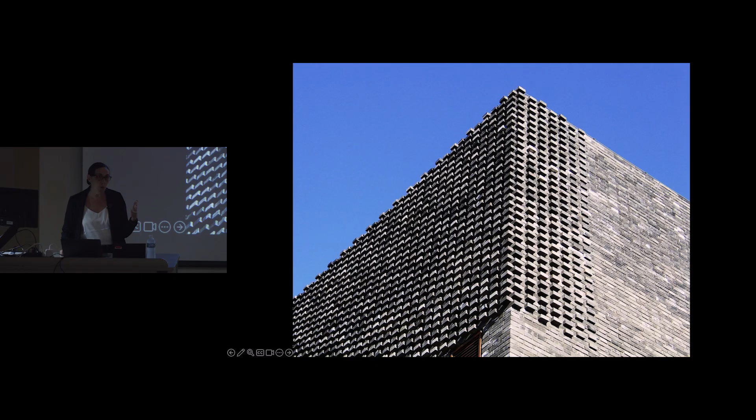I have always been very interested in the making of architecture, how we detail buildings, what are those materials that we put together, and putting them together in new and innovative ways. It took me to digital technology and digital fabrication, which for me was a big blind spot in the discipline when I became interested in it. I have pursued my interest through exhibition installations as well as full-scale constructions, and I think of it as all one and the same.

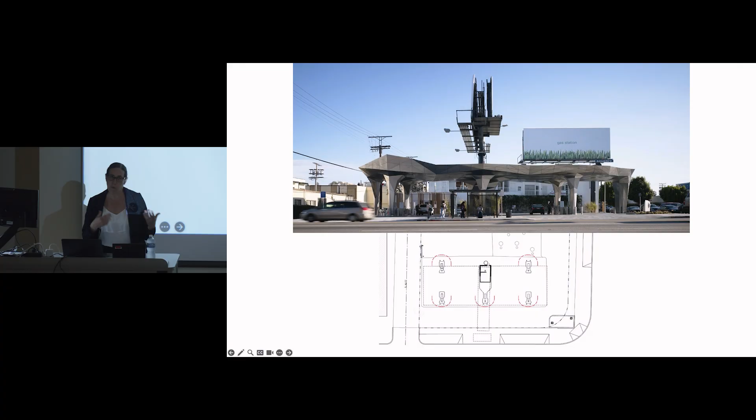So I think today architecture should be concerned with speed, and we should concern ourselves with things that might be very, very quick. When we did this gas station in Los Angeles, we had 9 months from the beginning of the project to the end. But of course, this is an object that you see when you're driving fast or when you're stuck in traffic, either one, it could be depending on the day. But we were asked to remodel this existing Arco station.

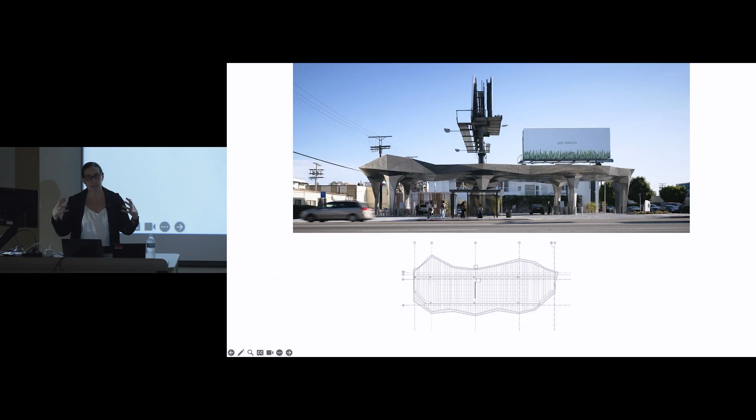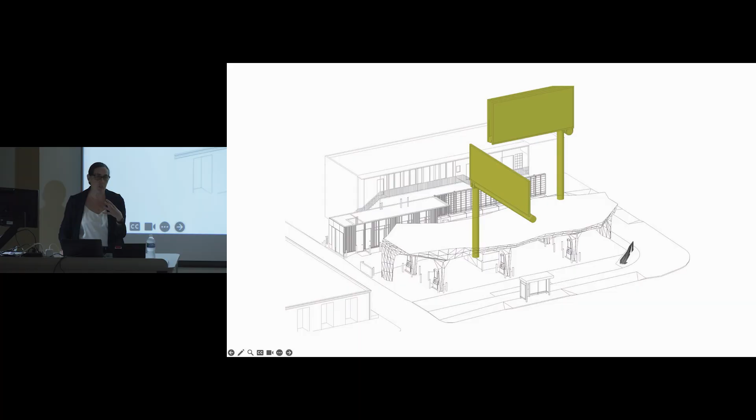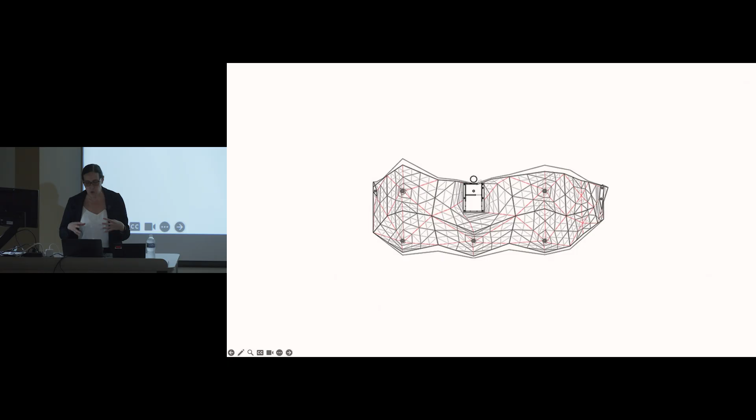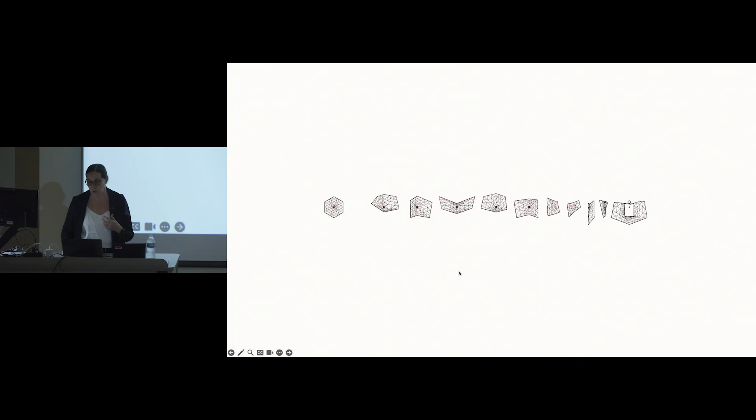So it's actually a remodeling project, and the code really put pressure on the character of the building. We were required to actually have certain overhangs in relationship to each of the pumps, and that gave the peculiar shape to the canopy, as well as its relationship to two existing structures, which are these gigantic billboards. So the billboards actually are the main reason for the deformation of the canopy. In order to respond to all these forces and to respond to them quickly, we decided to develop a module that could then be agglomerated into the canopy. So while each of the components might look different, they're actually part of the same family, and they're all derived from the same kind of module. That piece is then understood almost as the generator of the system.

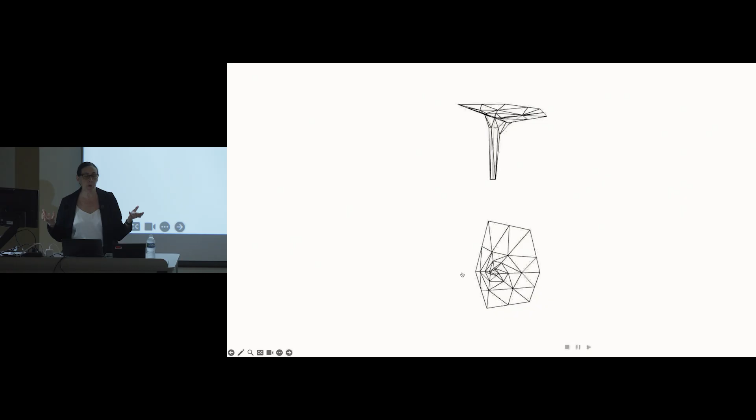And the intention when we were hired is that this was going to be a demonstration project, and that then this would repeat in other gas stations across North America. The module has the same number of components. All of them expand and contract depending on where you end up in the site and what forces you are responding to. So on the one hand, we have sort of what is almost a normal canopy.

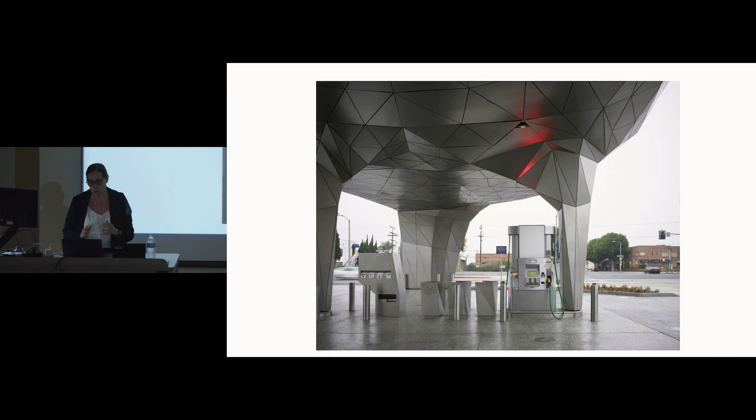Towards the edge, it gets squished because it's at the end of the site, and again, the property line is putting pressure on it. Or towards the street, it becomes more of a billboard. Or it can also house where you pay for the gas.

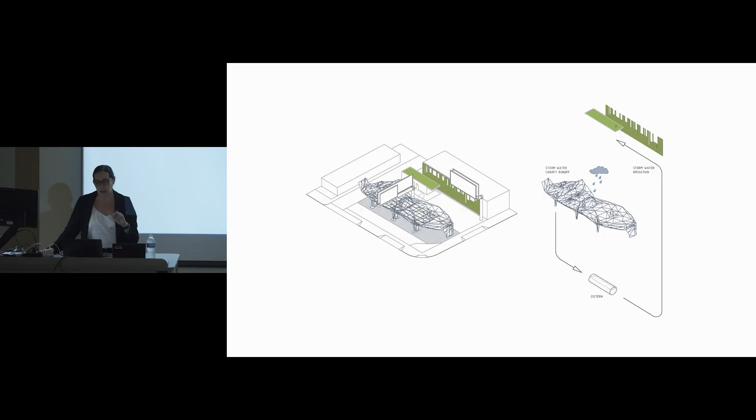Now, while we were very concerned with speed, and we were very concerned with the impression that the building leaves on you quickly—you're only there for a few minutes—we also were interested in the environmental impact of the gas station. I know it sounds like an oxymoron, but we wanted to somehow use the gas station, if it was going to be repeated throughout North America, as a test ground for how to deal with rainwater collection, even in an extreme desert weather like Los Angeles, but also that we could embed within the project ideas of remediating for the oil spills that inevitably happen when you are actually putting gas on your car.

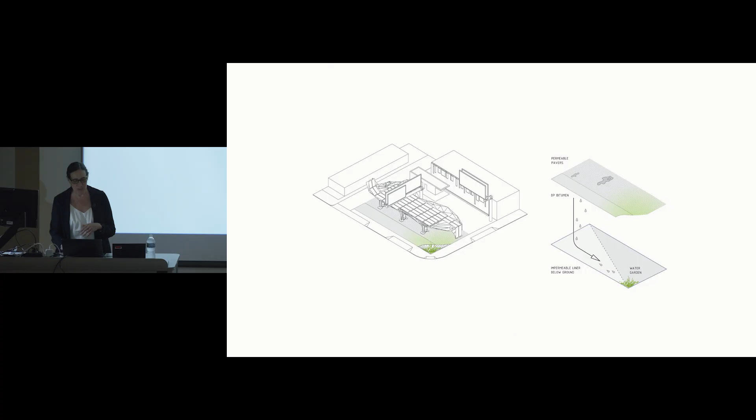So this combination between something that is fast, that you drive by fast, and something that actually takes care of the site, takes care of the ground, is something that for me is important, not only in a little project like this, but perhaps in every project.

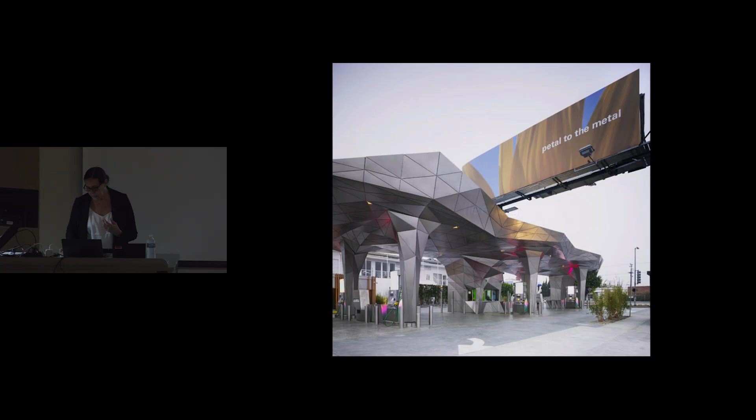Now, the truth is that architecture is fleeting. Most buildings have more than one life, and there is a loose fit between the program that the building is built for and how it's used over time.

So when we were commissioned to do the Fleet Library for Rhode Island School of Design, Fleet Bank, which none of you know anymore because it's disappeared, gave the space to Rhode Island School of Design, and it became known as the Fleet Library. This is a space that is in the National Register of Historic Places. It has amazing architecture, and all I could think about when we got the commission is, all I have to do is to not mess it up.

So how do you go into a space and not mess it up? We were really thinking of temporary structures, temporary pavilions, things that at one point in history could actually be dismantled and taken away.

This coincided with me being at Georgia Tech as the first Ventulett professor, and I was doing a series of experiments with students where we were using digital fabrication technology as a way of working out things like, can you build something without scaffolding? Can you use the technology to produce joinery that allows you to put two things together easily and produce complex forms?

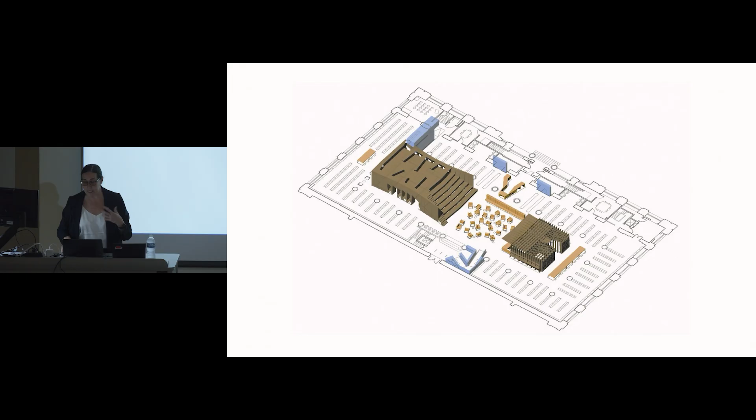The library had more program than the space could hold. So we came up with the idea of doing two pavilions that float in the space, one holding sort of noisy functions like Xerox machines and group study, et cetera, and the other one being the circulation island where you check out and return books. And the pavilions sit freely in the space and really welcome the students into their functions.

We thought of the library as a gigantic living room to the dormitories above. So we really designed it as a place where you could engage on multiple scales. For example, on top of one of the islands, you can access it and be really close to the capitals, be really close to the coffering. So we're also offering a different experience of the space that was never intended.

Now, in order to be able to build these—I call them temporary, but Rhode Island School of Design does not think of them as temporary—we needed to prefabricate them off-site and then bring them and build them inside so that we could coordinate with the academic calendar.

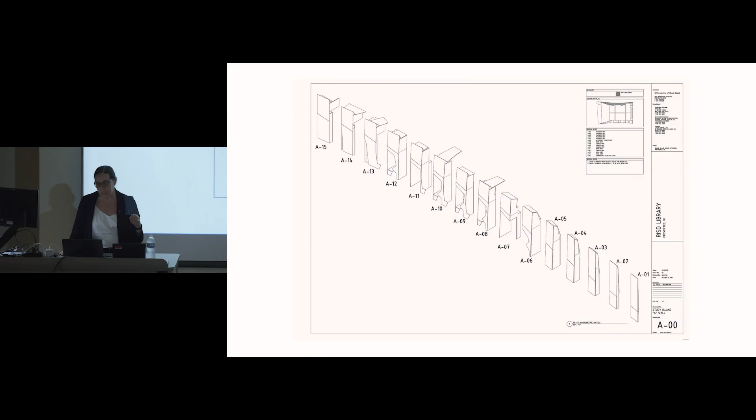So we convinced Rhode Island School of Design that we should digitally fabricate them. This is a time where every shop in America already was digital, but architects acted like they didn't know it. And we invented a new way of thinking about shop drawings. There are no shop drawings for the project. Instead, what we did was a manual of assembly.

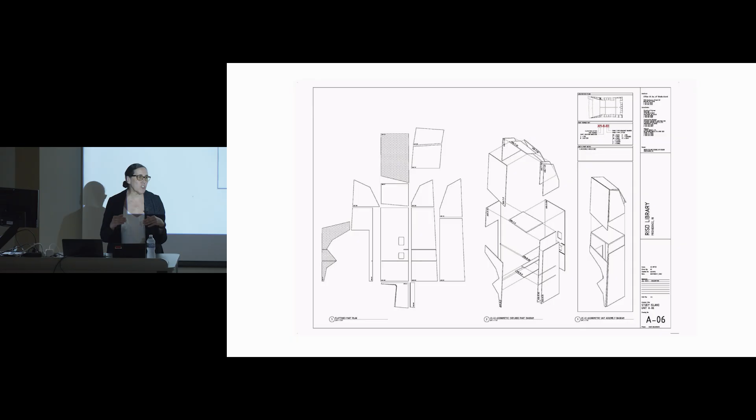All of the components of the pavilions have the same number of pieces, and we guide those who are assembling it into how to assemble. One of the things that is interesting about digital fabrication is that the tools, the machines don't care what shape they cut, but you have to worry about who is assembling it because, of course, it's assembled by us, it's assembled by people. So understanding that translation was an essential part of the project.

We also realized that because Rhode Island School of Design has students for 4 or 5 years, we had a dedicated audience, which is a very different kind of public. It's not a public like one that goes to a museum once in a lifetime. This is the kind of public that comes back and comes back and comes back. So we were interested in using digital technology as a way of engaging the human body. We decided to not design for the average, like in graphic standards. All of you are probably familiar with this.

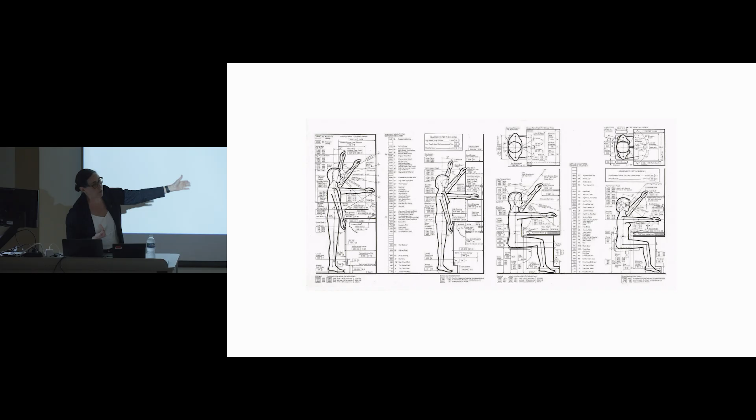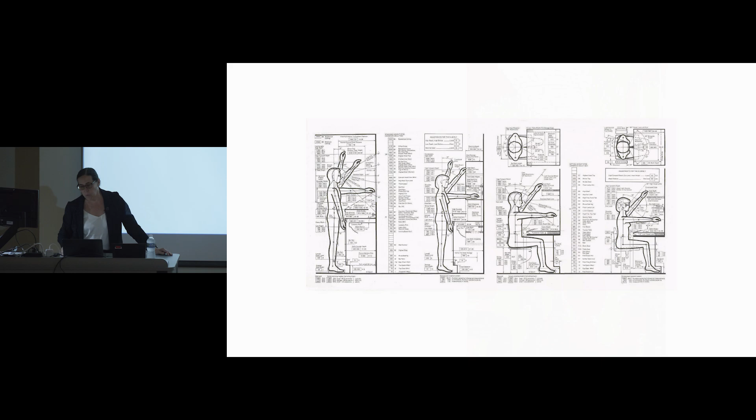Instead of designing for the average, we decided to design for the range. So all of our benches are different heights. All of our benches are different widths. Some of our cubicles accommodate wheelchairs. And in some cases, we were very didactic, from the tallest standing male height to the lowest seated female. So the intent was that digital technology, in combination with the length of time, allowed us to design for many as opposed to the average few.

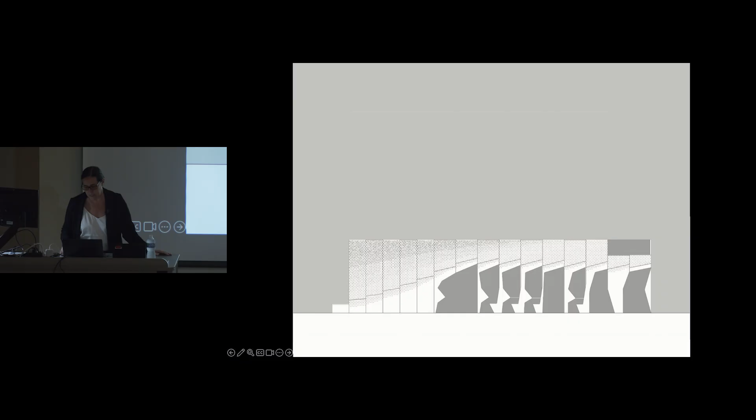So we asked the librarians to come up with names of artists. We knew that we could afford 20,000 characters as a way of perforating one of the pavilions, which was the heaviest in the space. We developed an alphabet, and the librarians obliged, and they gave us a really nice list that represented not only world artists, but also faculty within Rhode Island School of Design.

And then something really lovely is that they played a joke on us. So the name of everyone in the team is in the library, but also I was pregnant at the time. The names of my 2 children are on the walls of the library, as well as my 2 dogs, which is pretty sweet. So if you walk around and you see a Laszlo, it's not Laszlo Moholy-Nagy, it's my dog.

So while the premise of the building was one of transition, one of building something quick, because it had to be built over the summer—it was built on modules, by the way, and they arrived on a Monday, and by the time I came to the site on Wednesday, they were done. I missed the assembly. So while it was predicated on this idea of something that could be quickly assembled but also taken apart, the cultural framework that it produced, I would argue, is equally important.

Now, if we think of the word time, we also need to think about not just quick or long, not only passing and fleeting or long-lasting, but we also have to think of the mundane sort of passing of time during the day. And this is something that architecture, I think, does extremely well. We are all aware of the time of day by how a building is designed, and in particular by how light is accessed, and whether we understand the change of the light from day to night.

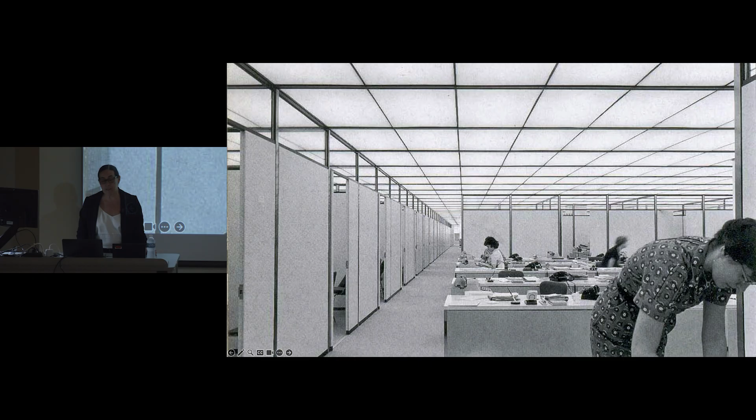This is, I think, particularly important when thinking about access to light as a commodity in workplaces. So the American workspace is actually predicated on light as being a commodity. This is a prototypical early 20th century office building where all of the offices of the executives are in the perimeter and the support staff is in the center with no access to natural light, instead afforded quite a lot of artificial lighting. This is a prevalent model.

So when I was asked to do this very small, low-budget office building in Logan, Ohio, I became obsessed with this idea of no corner office, and that light somehow should be evenly distributed. Now, distributing light evenly is actually an impossibility because you are either close to a window or you're not, or you're close to the edge of the building or you're not.

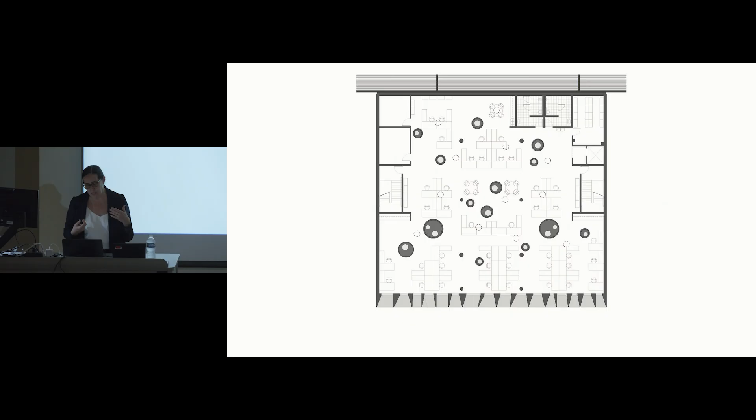And this is particularly difficult when you're dealing with a very cheap building. There's no other way to describe it—low budget building—but also one that is facing west, meaning that the primary source of light will really be intense at a certain time of day. So what I decided to do was to create an open plate that acts as a free plan where everybody's sort of the same, so engineers are sitting next to support staff. There is not a hierarchy of creating offices.

And I was very lucky to be with a client that got excited about this idea. It fit the ethos of how he thought of his company. This is the upper level. And then on the lower level, we actually created offices that needed to be offices, like accounting, for example.

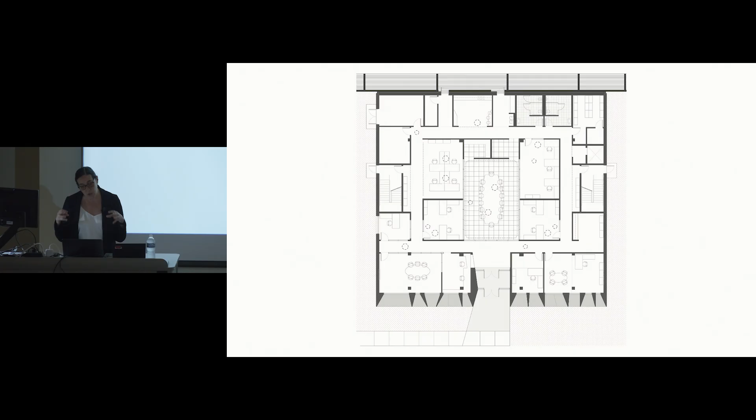You don't want all the numbers out in the open, or the research branch that has secrets, et cetera. So those actually get proper offices in the lower level.

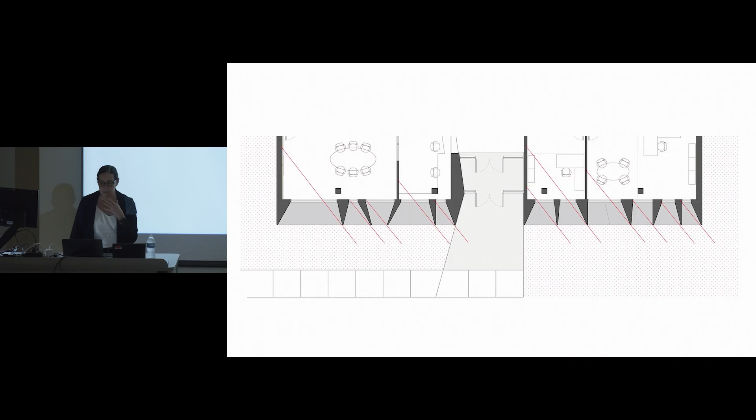So for the West, we designed a brise-soleil facade, and the facade is calibrated very specifically in relationship to the furniture behind it, so that no direct light falls on a desk, so everybody has the same level of even light. And in the lower level, it bounces off walls. It's interesting to see how the building changes dramatically throughout the day.

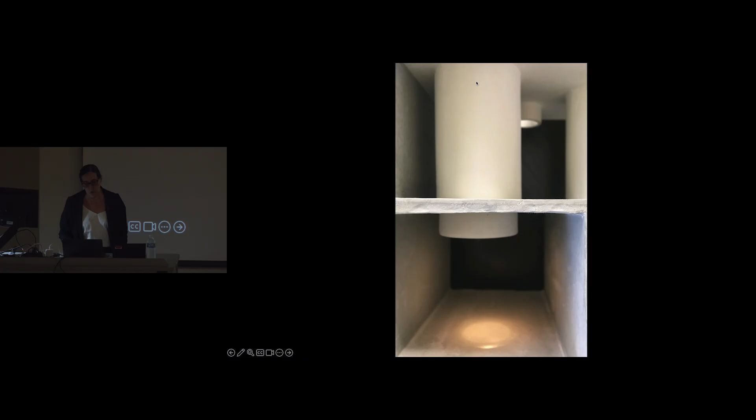Now, for the interior, we have a combination of structure and systems that penetrate through that upper level into the lower level. Most importantly, we created a distributed system of skylights and solar tubes, some of you might be familiar with this, that bring light not only to that upper floor, but also penetrate all the way through to the lower level.

And what this did is actually quite remarkable, because you have even natural light throughout the space. In fact, at the beginning, it was a little too intense, and they had to adjust the solar tubes to lower it a little because it was just too bright, which for me was a surprise. When they asked me at the beginning how much I wanted to adjust it, I said, none, I want a lot of light. And then it was too bright. So the idea is a very distributed system that brings light equally throughout.

And the hypostyle hall, then, again an ode to the Johnson Wax building, creates a lot of variety. The structural system is of one size, mechanical systems of another, and the solar tubes, which are sometimes combined with mechanical systems, of another. This kind of distributed system that brings together different logics creates enough variation that it pushes all the different desks and workstations together in a very intense relationship.

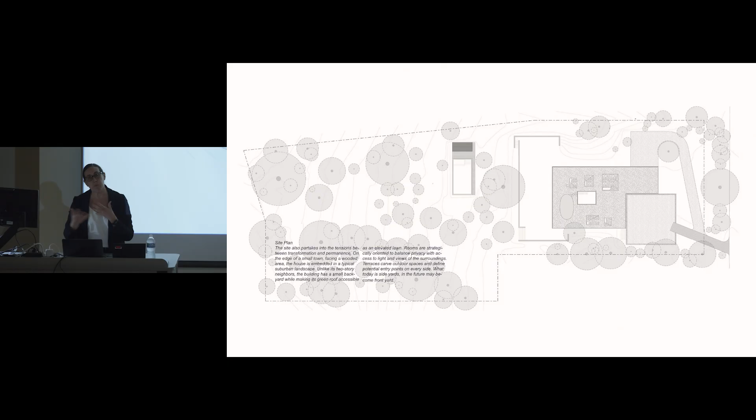We just opened an exhibition at Princeton called The House Transformed, where I asked almost 50 architects to imagine homes that are no longer the single family home. The idea of transformation is essential to the exhibition. This is my own entry into that exhibition. I was interested in thinking differently about the suburban home, not as for the quote-unquote nuclear family, but a suburban home that could accept multiple versions of family and could definitely change over time.

That music is not mine. Although I like it, we can leave it as background. Very present in my thinking.

So I should have said, I'm sorry, when I talked about the corner office, I mean architecture for me is always very personal. It's difficult for me to think of things without tying it to people that I know. My mom was an administrative assistant since I was little. So my mom was one of those people that never had access to natural light.

So I had very present Eliot Noyes' home. I never thought I would design a house for my family, and here I was designing a house for my family. Eliot Noyes decided to do this sort of house in the woods with a lot of glass, a lot of reflectivity, and this is one of the bases for the project.

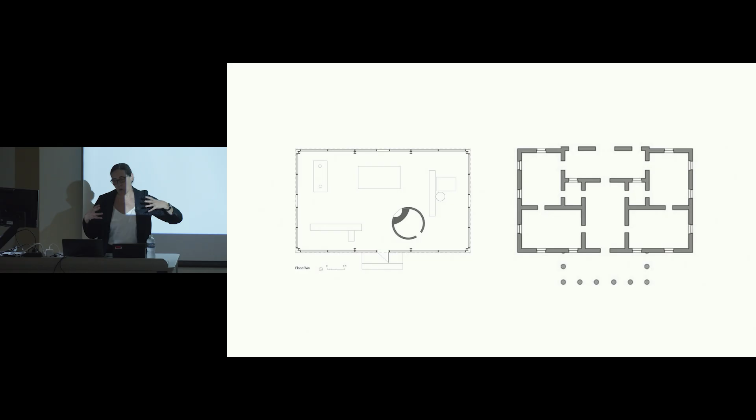And I became interested in 2 modes — I always like both and. On the one hand, the free plan of the glass house. On the other hand, the poché of Palladio, and how both are insufficient really for structuring life. One is too open, one is too closed, and they say different things about us as humans.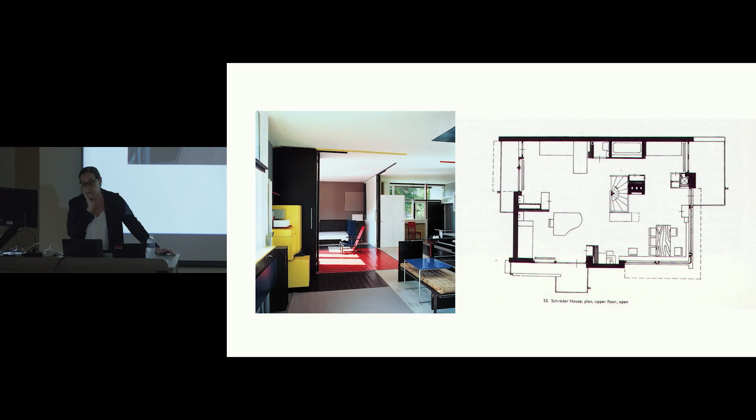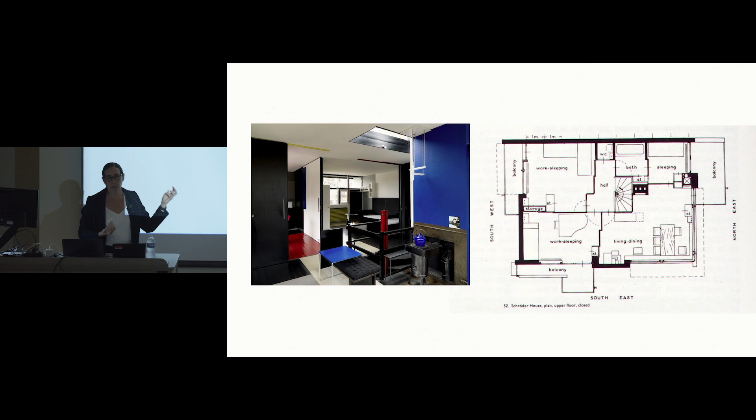I began to think of alternatives like Rietveld, who designed a house for Mrs. Schroeder and her kids, a single mom like me, and how that house actually transformed every day. Every day they took these walls and closed them and made rooms out of it. So I thought, is it possible to reimagine the American single-family home in this way? And I thought, no, of course not — this is crazy, this is a very rarefied example. But I think there are still lessons we could learn from it.

So I set out to design a house that would very much operate as a free plan with a great deal of exchange between members of the family.

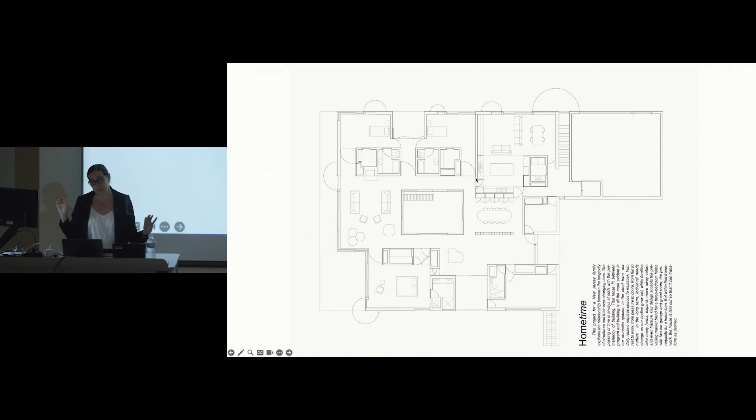But I also decided it was important to embed within it the possibility of change. So the house has these oversized doors, 5.5 feet wide, that when closed blend into the paneling system of the home and become walls. So the house is intended to oscillate between free plan and poché over the course of the day, but also welcome change over time.

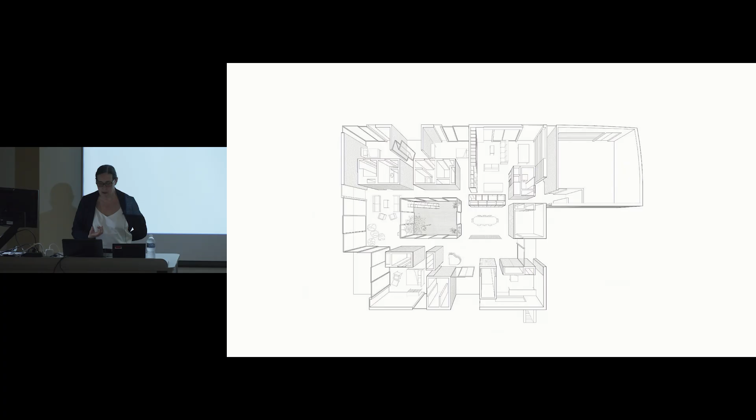It was important to me that the house be one story so you can grow old in it, but also that one story could revolve around a courtyard. I'm from Caracas, Venezuela — the courtyard home is one of the prototypes we look towards. I thought of the courtyard as one of these floating objects of the free plan. It very much interrupts the flow of space, but it also reflects the outside — reflecting trees, reflecting the passing of clouds.

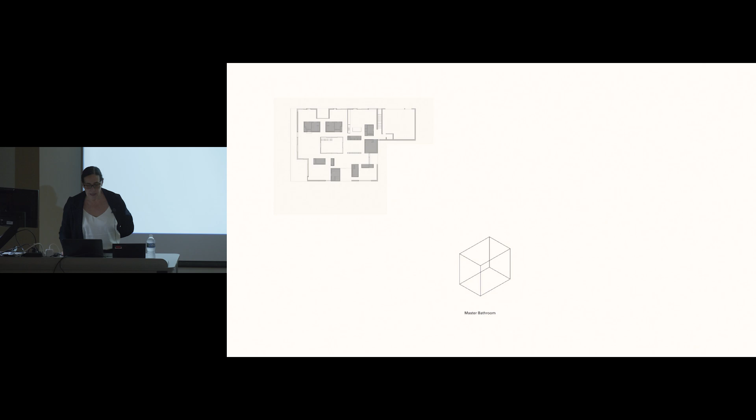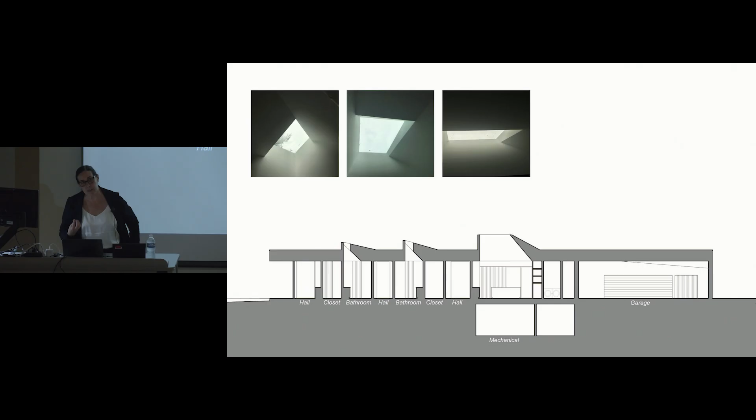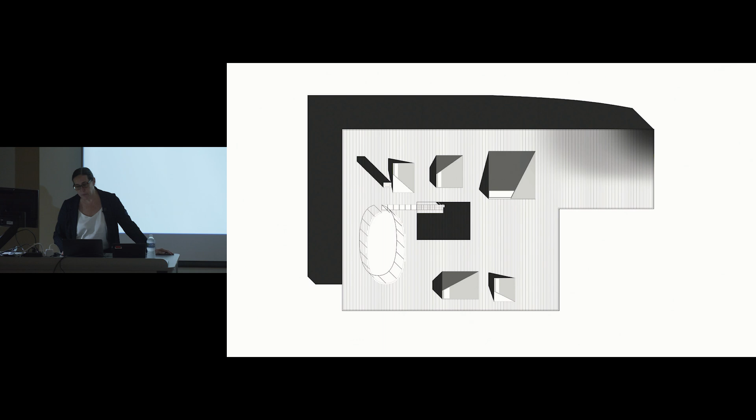So what makes this a free plan, what makes these objects, is those immovable components like the bathrooms and the kitchen — very traditional free plan in that way. But these objects push through the roof and open up skylights as a way of stealing light to those cores, but also as a way of creating a landscape on the roof, which for me was important — bringing that green from the ground to the roof.

So even though the house occupies a big chunk of the site, I recreated, let's say, the green in the roof itself. You can barely see it, but this is actually one of the skylights, which becomes a mound on the ceiling, on the roof.

Now, if the house is intended to change over the course of the day, it's also intended to change in the long run. When the kids go off to college, you can close the doors and make this into rental units. All the closets are pre-plumbed to receive kitchenettes, with the intention that what is now a side door will then become a front door.

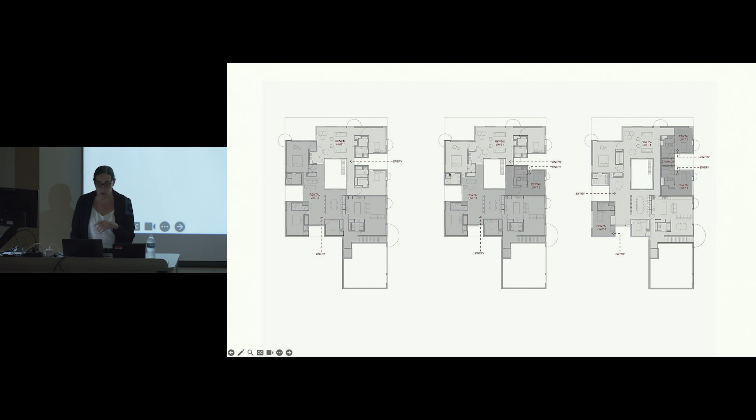In fact, the plans have multiple versions and multiple ways of being subdivided and occupied over time, to the point that you could have 2 units sharing a living room, or you could have a master bedroom and a smaller bedroom with a shared living room, and so on.

So I've been struggling with how to represent this oscillation between free plan and poché, but also how to represent the passing of time. I would love a conversation about this at the end of the lecture, whether this is one successful way of doing it, this sort of layering of time in the drawing itself.

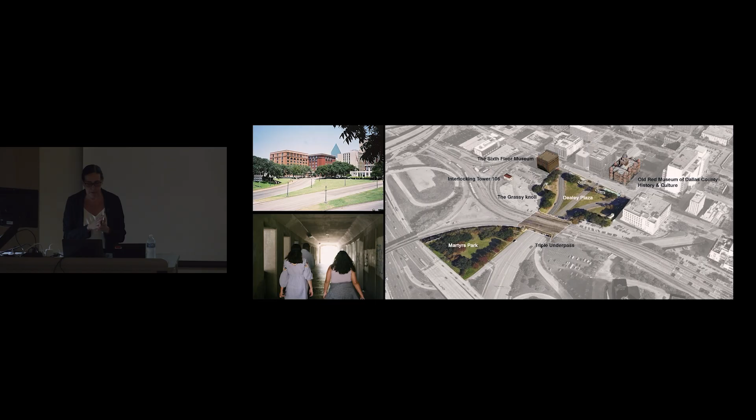Now, one of the most important things that we do as architects is to remember. And very few of us ever get an opportunity to work on a project that is intended to remember. I was really fortunate that the Dallas Morning News asked Stoss Landscape Architecture to work on developing a memorial at Dealey Plaza. Chris called me and asked if I would like to collaborate on this project, and I'm really grateful. What's amazing is that right next to Dealey Plaza, where JFK was assassinated, there is a park called Martyrs Park, where 3 black men were lynched in the history of Dallas.

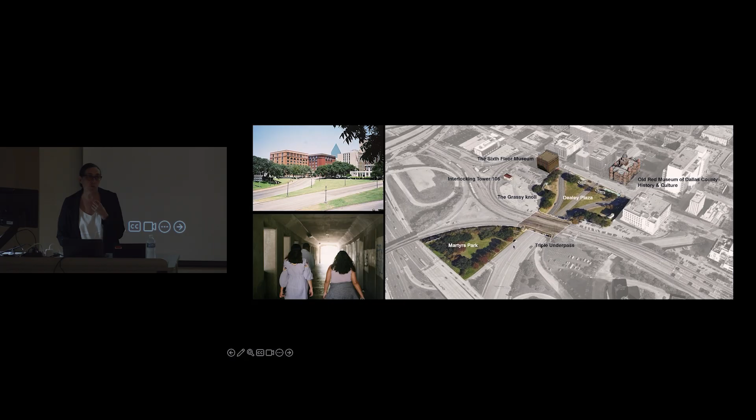The park is really severed from the rest of the city. This is how you walk to get there, through a horrible underpass. And currently everybody is driving over the spot where JFK was shot. So the project intends to stitch together both parks, where horrible events have taken place, as a way of making sure we can have a conversation and that this history is not hidden or eradicated.

So we carefully decided to close the road to vehicles and only open it to pedestrians, but also develop a boardwalk that brings you up and around. The boardwalk then transforms so that events can take place, in some cases sort of a green auditorium, doing very little to intervene on the ground itself, where JFK was shot.

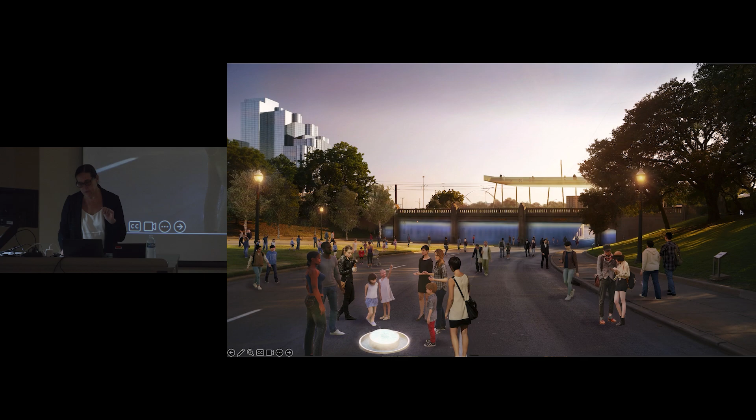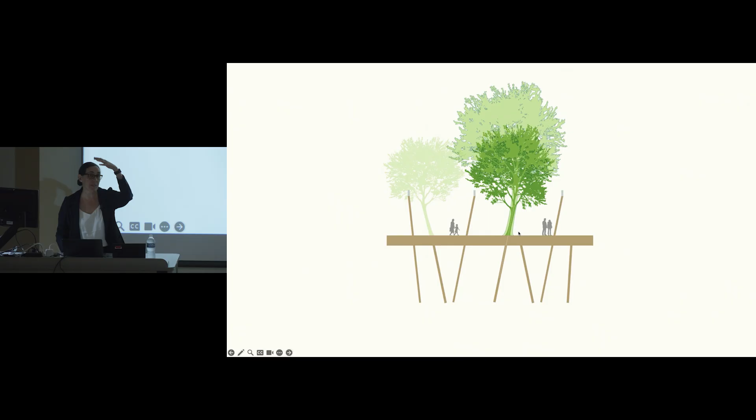Currently they put an X in chalk on the ground, and it gets erased as it rains, then they go back and put another X, which is sort of incredibly disrespectful in my opinion. So when we designed the public space, we decided to put it lightly over the railroad infrastructure, and we made the columns slightly tenuous and unstable-looking, because this is sort of an unstable place. Chris came up with this fantastic idea of having the trees lean, and what I love is that as the trees grow, they're going to straighten themselves out. For us, this is a place where we look back at history, but hopefully have a positive outlook.

And this is Martyrs Park, which was actually a competition won by an artist, and I think he's done a beautiful piece. Our project encompasses both sides.

Time in Spanish is really a beautiful word because it means not just 8 o'clock in the morning, or this year versus next year. Time also refers to weather. And I was very interested in the idea of our buildings also registering this atmosphere that happens around us.

So when I was commissioned by the city of Pompano Beach to do a cultural center and library, 2 different projects, media arts center and library, on this site, I thought it would be an opportunity to really use the building as a way of registering what we all experience together as humans, which is the dramatic changes of weather in the course of the day or the year.

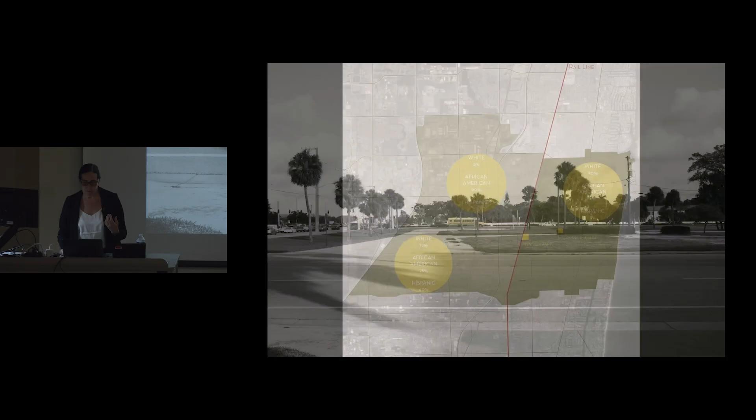The existing library is in the center of a neighborhood that is primarily Caucasian, and the city very wisely decided to move the library and add the Media Arts Center to a place that is really a cultural intersection on the site. We had 2 clients, and the only thing the Media Arts Center and the library had in common was that they had a grant for technology. They were never in the room at the same time.

It really became a negotiation with 2 groups that were never together, that had completely different aspirations. The library, for example, wanted the entry in the back towards the parking. The cultural center was horrified, and wanted the entry in the front towards the bus stop. In the end, we decided it was important to do a building that could bring all these forces and interests together, as opposed to putting them in contradiction with each other.

So we designed a building with 2 entrances, with a breezeway that then opened up into a courtyard so that you could see the 2 doors.

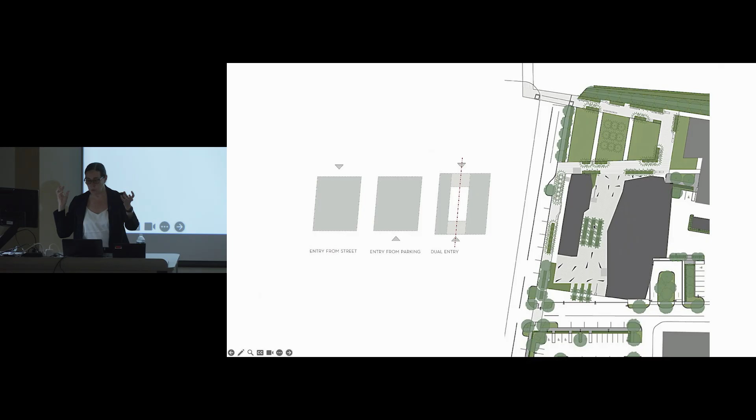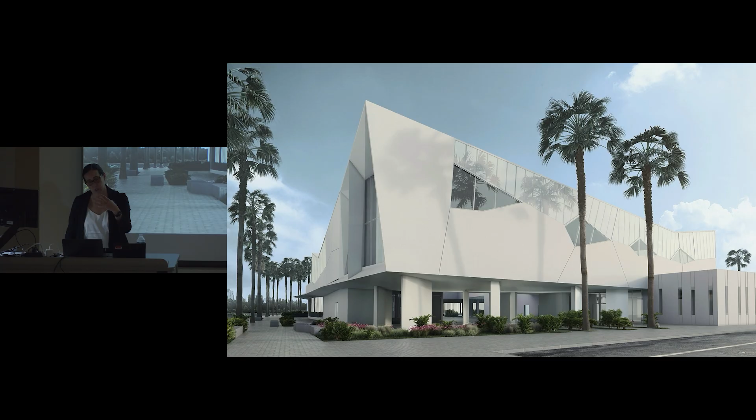The building also opens up at the ground as much as possible and then brings you up to the upper levels as a way of gaining space.

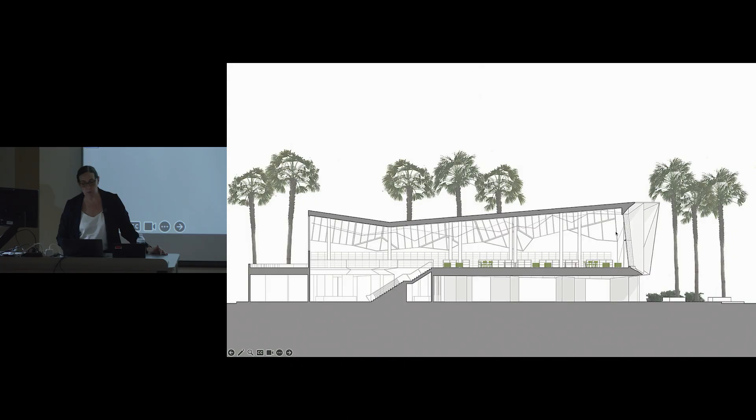For instance, while the courtyard is porous and open, the reading room climbs over the breezeway as a way of providing a quiet space for seniors. This was very important to them, while the ground level is really given up to kids who are quite loud and noisy. The two are still related, but it created a certain level of acoustical separation that allowed the reading room to succeed.

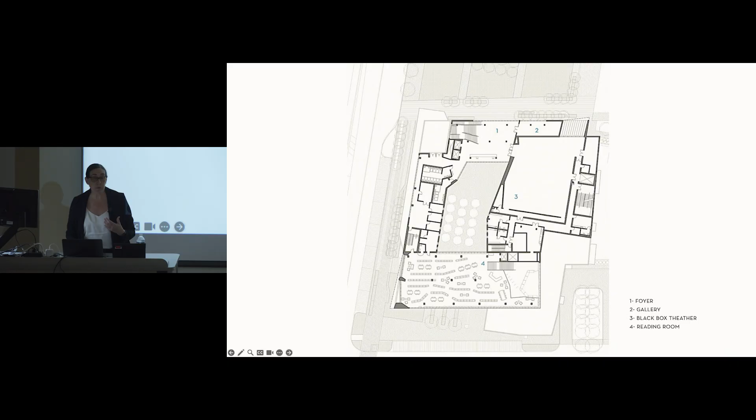And then also in the upper level is the black box towards the street, which is quite active at night. It's the Media Arts Center, so they have events on the black box almost weekly.

So the building itself becomes a register of the change over time. Depending on the weather conditions, the glass changes in character from being very reflective to being almost transparent, to then really taking on the color of the sky itself.

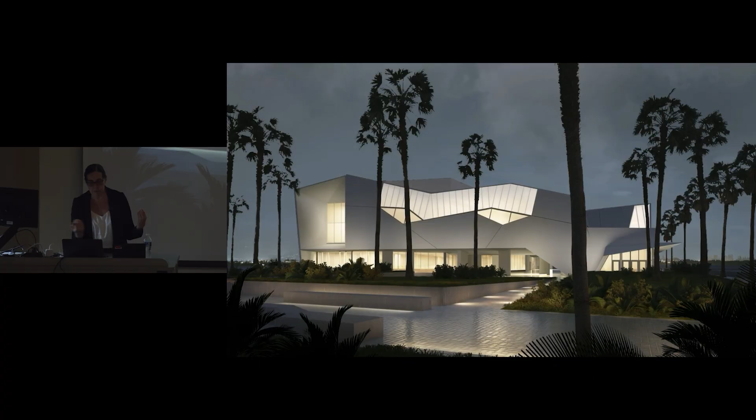But also at night, while the ground has been active during the day, at night is really when the upper level shines and takes hold. We wanted to make sure that was something really clear and visible, as the building changes from the function of the library during the day to the function of the cultural center at night.

I have to say it's been exciting to see, and I wish I had better photos of the building, but it's been exciting to see how the building really reflects the sky, and how it has become a cultural magnet for the community.

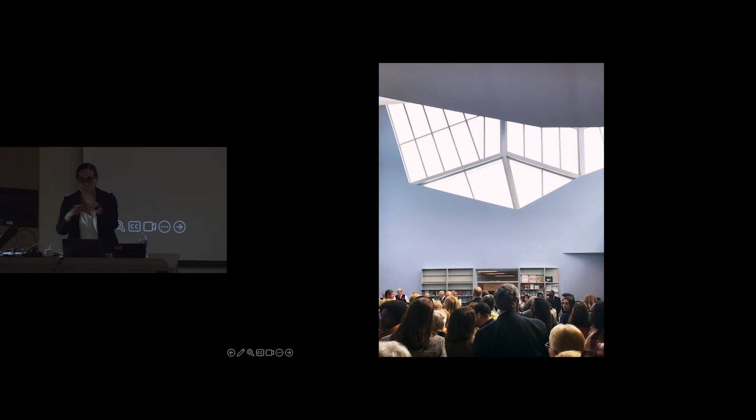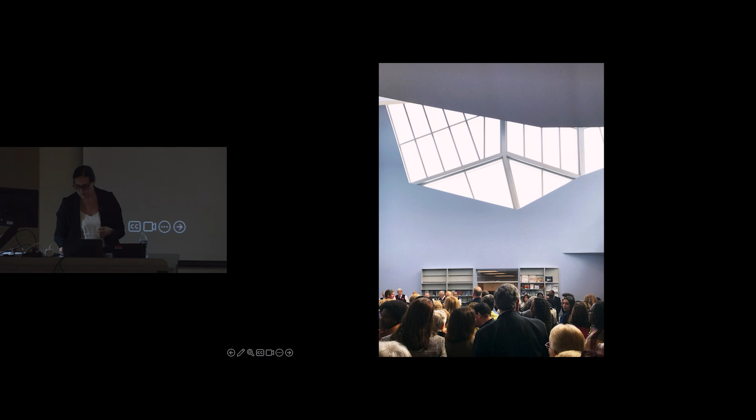I'm also interested in this idea that we can recreate an atmosphere within a building, that architects themselves can actually do something akin to weather or akin to nature.

When I was commissioned to do an atrium space in New York City, I thought it was an opportunity to visit this as a topic.

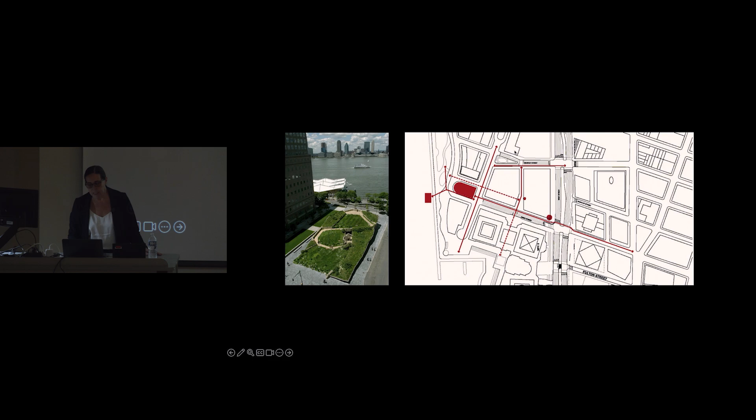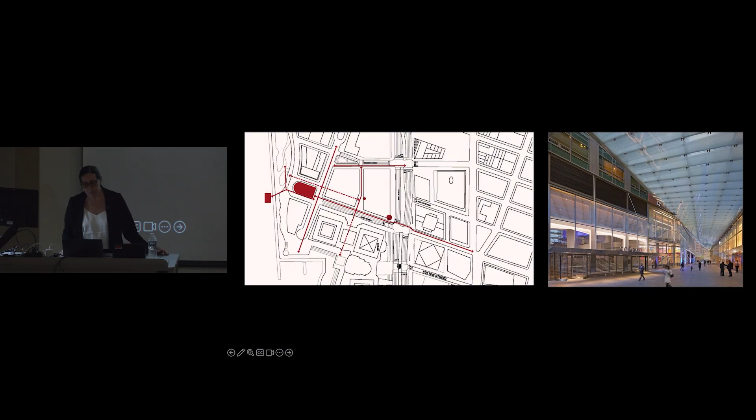Next to the ferry station, it's an area of Manhattan very well traveled, in Battery Park, connected with a series of public spaces like this beautiful arcade by Scott Cohen. The project also had a fantastic public mandate.

In the city, in Battery Park, all the public spaces have to be elevated 20 feet from the ground because of flooding. But at the same time, they have to be public, meaning they have to be open as a right-of-way for the public. You can't close the door and close it at night, which is great.

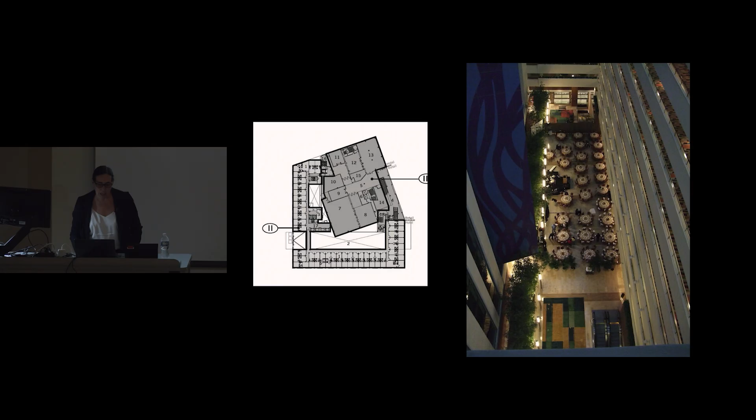Can somebody tell me where the public right-of-way is? Because I can't find it. Can somebody find it? I can't find it. So the city only requires a 5 foot wide public right-of-way, which I thought—how can 5 feet be public? A hallway in a house can be 5 feet. So the first move that we did—let me back up.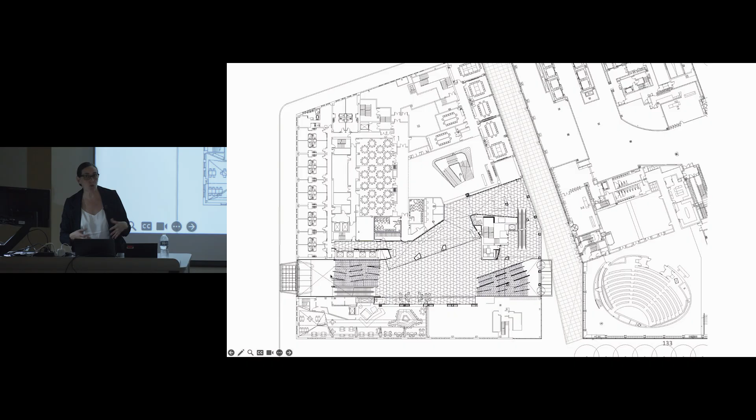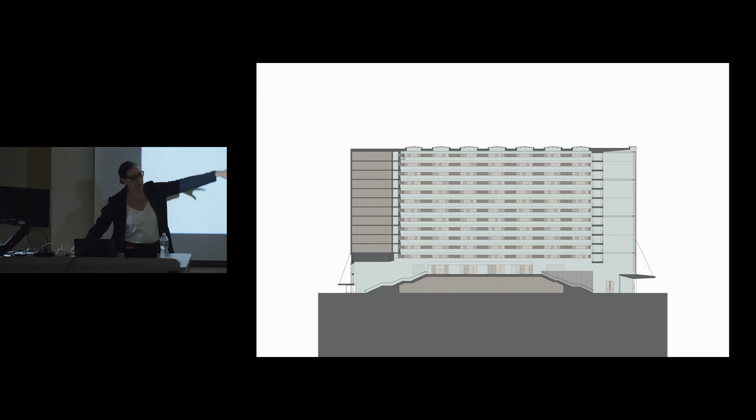We made the access to the escalators really public and loud, so you wouldn't have to go fishing for them—sort of like the Piazza di Spagna, really grand up and then grand down. So we went from something like this with little escalators and nothing else to something like this, where at least visually it welcomes you.

Now the big elephant in the room was, of course, that multiplex that was really stuffed into the atrium. What do you do with that? It's not a normal atrium. And on top of it, it's not just any multiplex—the previous owner of the hotel had actually commissioned Sol LeWitt to do a drawing, it's called a drawing, over the multiplex.

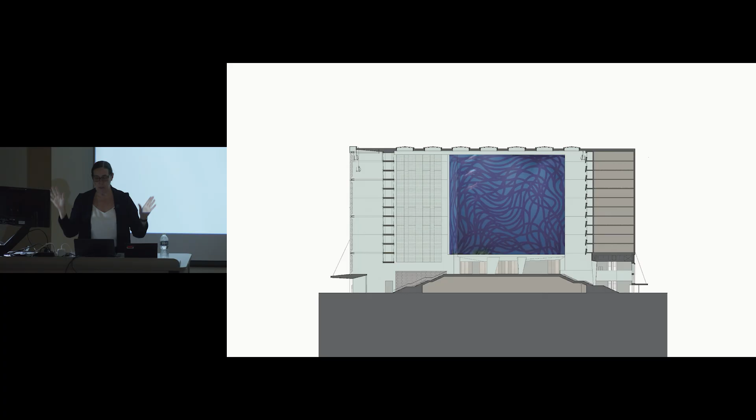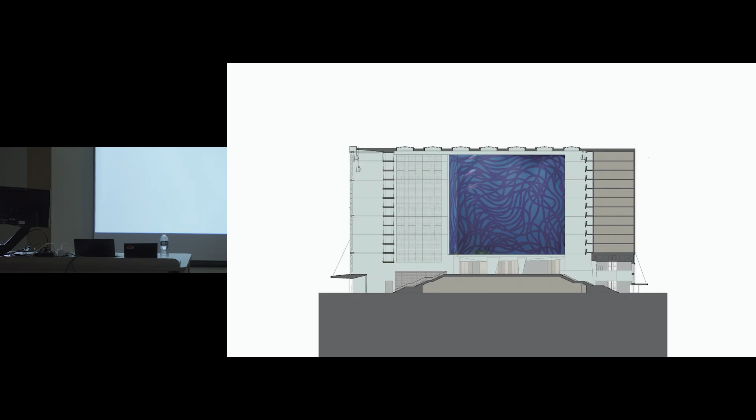Now, when I originally was interviewed for the project—I'm going to confess this, and I'm ashamed of it, but I'll tell you—they interviewed me for the project, and the client says, what will you do with the Sol LeWitt? And I say, I will just get rid of it. Which in retrospect, I am so embarrassed, I cannot believe I did that. And the client said, no, we're keeping it.

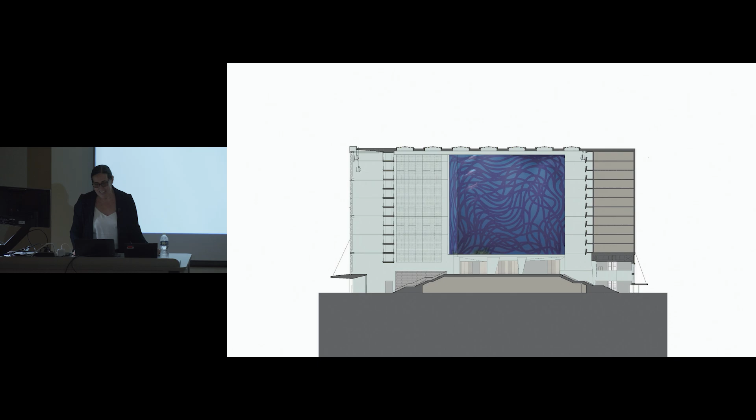Thankfully, the client said, okay, I like your work, I want you—he commissioned 5 different people to do 5 different projects, and he said, but don't get rid of the Sol LeWitt. Which is challenging, right? So my starting point was, let's get rid of the Sol LeWitt—again, I'm horrified. I'm glad I had a good client and that he didn't let me be a bad architect. But then I started thinking, okay, what do you do with it?

So I started thinking of veiling, screening—how do you create a screen? How do you veil it, but in a three-dimensional way? Sort of the difference between this kind of proscenium and something more like Cirque du Soleil that is more three-dimensional.

And then I started realizing it was an opportunity to capture an atmosphere into the space. Again, in every project, one tries to scratch an itch. And I have always been enamored with this project by Diller Scofidio—I call it the cloud, though I don't actually know the official name for it.

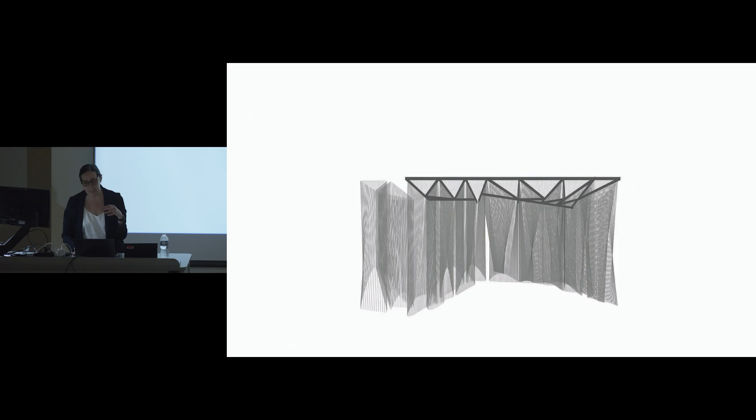I actually happened by chance to see it in person in Switzerland—this is a temporary structure they did in a lake there. It's a cloud, and it's sort of amazing because you walk into it. You, of course, cannot build this in a building. But I thought maybe it was an opportunity to really inject what I came to call the veils into the space, this element that floats and fills the atrium.

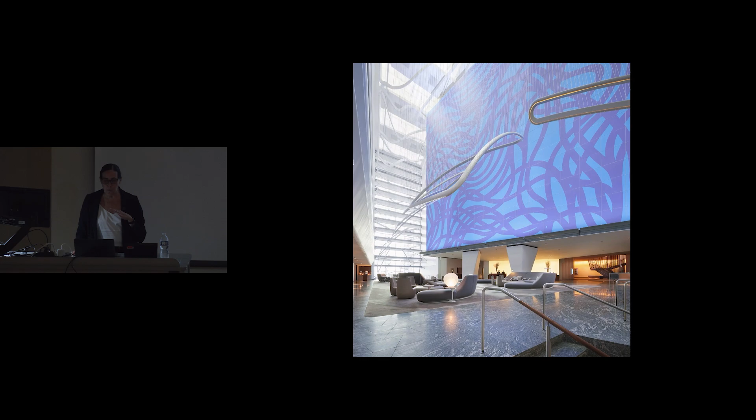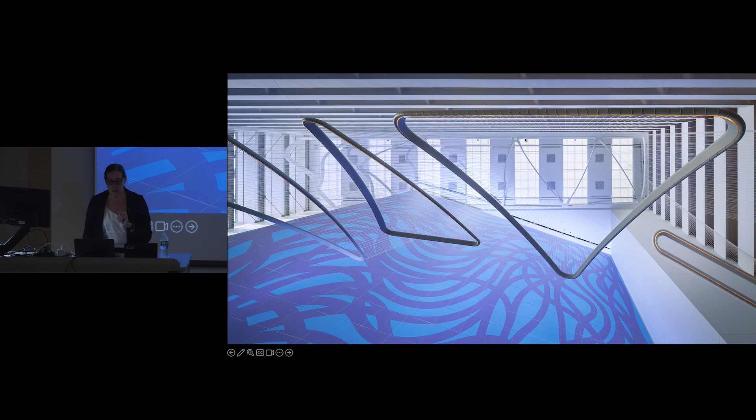We became interested in how these veils are shaped and given structure. So we have what we call the lower rings, which begin to play with the Sol LeWitt, and I hope they keep good company with it. They are highly calibrated so that they help organize the space and unveil the Sol LeWitt depending on the point of view, but they also play with the upper structure in the atrium, taking clues from an existing skylight on the eastern side of the space. These are just different studies of how they unwrap and unveil as you go through.

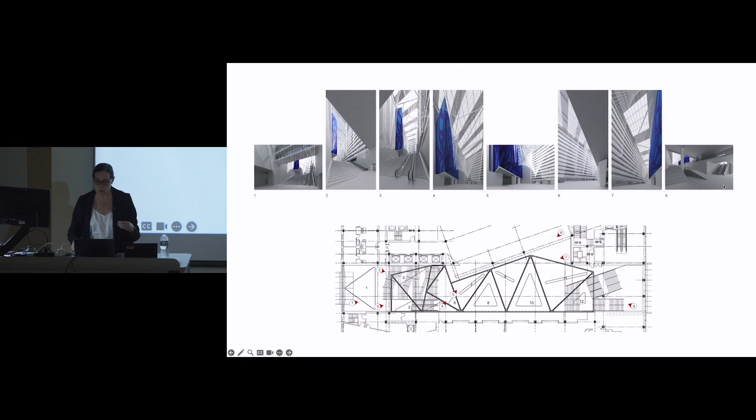They come down, and sometimes they come down below eye level as you go down the steps. But also they are intended to produce an experience as you walk in the upper balconies.

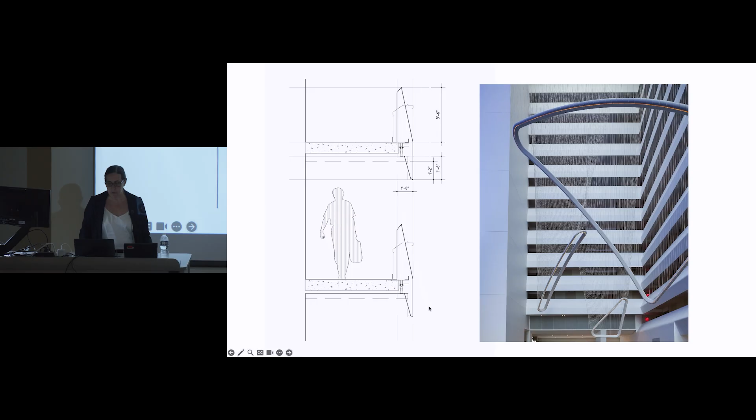The balconies were modified. We replaced the drywall balconies with shaped Corian balconies, and the shape of the balcony is intended to direct your view towards the lower level, so that you are experiencing the veils at different levels.

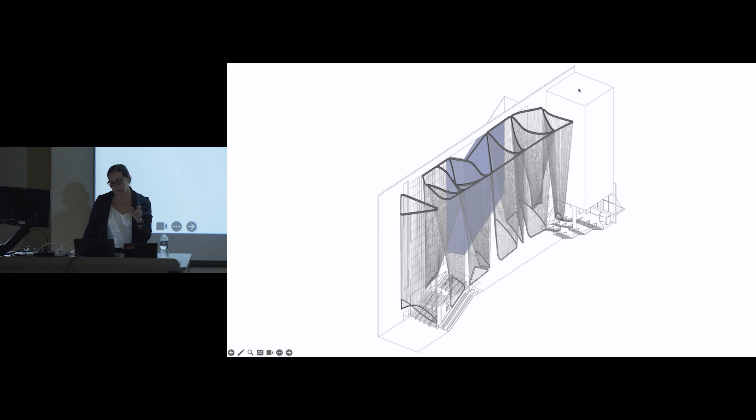They produce, as you move, the effect as if it's almost like raining inside. They are made of a translucent fiber that is impossible to photograph, but also begin to create a space in the upper level that allows for the cleaning basket for the skylights to penetrate it, keeping good company with the Sol LeWitt.

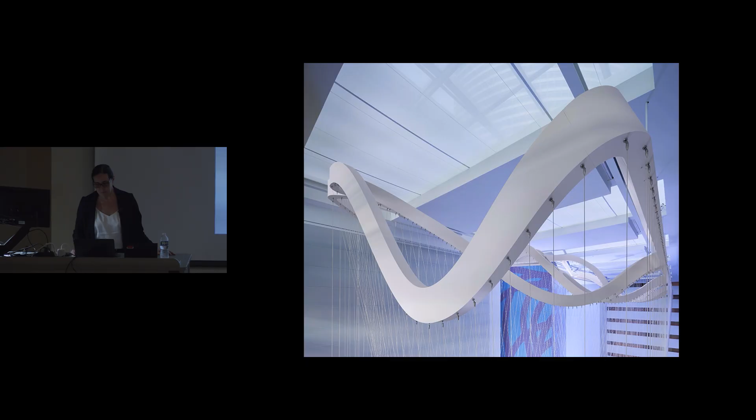And then I hate open elevators, but I wanted the elevators to be part of the experience. So we actually did a perforated mesh that allows you to look out, and then you don't see the technology of the elevator from the atrium itself.

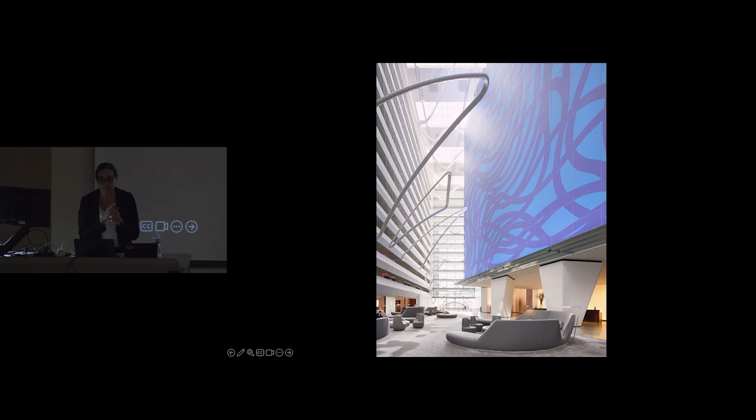Hello, thank you Professor for that wonderful talk. I was just so intrigued by your project of the Dealey Plaza. I was wondering if you could expand on it. When I looked at that aerial view, what I saw is that you are basically turning a non-place into a place, in the sense that an American highway intersection has always been a non-place. You were proposing quite the antithesis to it by making it a publicly accessible pedestrian space. So if you could expand on that, that would be wonderful.

That was very much the intention. My thesis in school was the role of infrastructure in the production of public spaces. And this to me is a really good example of infrastructure that gets in the way of producing public space. The first time I went to Dealey Plaza was maybe 20 years ago.